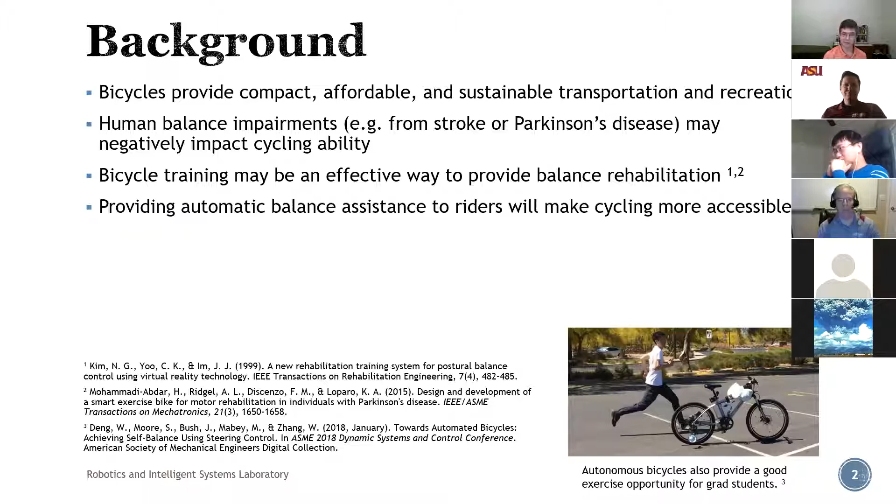Autonomous bicycles also provide a good exercise opportunity for grad students. This was a previous development in the Smart Bicycle project that started back in fall of 2017, and this shows our previous steering balance system in action.

Some research questions that I developed: how can we identify the rider's steering intent from the interaction forces? If we're going to provide balance assistance to the rider by controlling the steering, we still want the rider to be able to maneuver the bicycle freely in the direction they want to go, and in order to do that, we need to figure out what their intent is.

A constraint on that is we want to do it with non-invasive sensors. We don't want to have wearable sensors that you have to apply all over the person's body to figure out what they want to do.

We also want to study how healthy cyclists respond to induced bicycle steering disturbances. This means that if you're riding along and you go over a bump or something twists your steering, how do you react to that?

So I looked at developing a method for inducing repeatable steering disturbances on the human bicycle interaction bike. Then, as a second part to this thesis: how can controllable balance assistance be provided in a self-contained bicycle system?

This should be accomplished with stationary and moving balance control modes: one with a control moment gyroscope that generates internal non-anchored torque within the system to keep the bike upright, and also with steering control, which changes the steering direction of the bike while it's in motion.

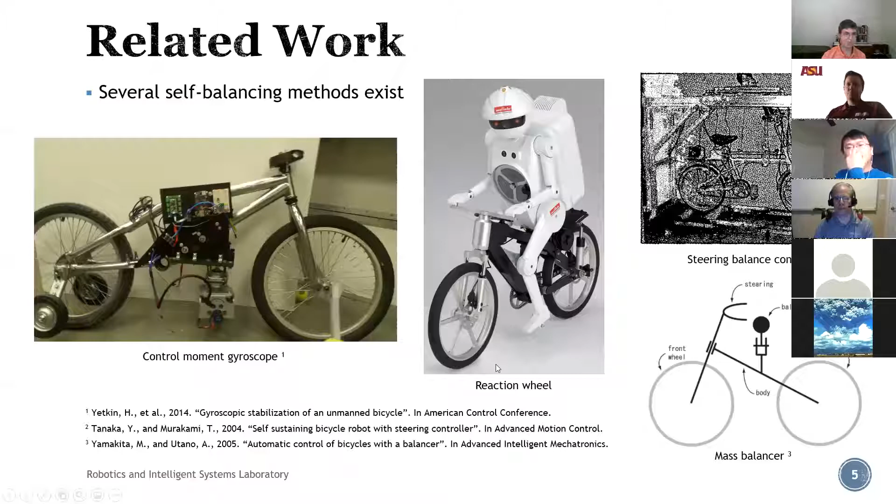So the scope is basically divided into two parts. I'm looking at how we can address these problems with an embedded systems approach.

For the comprehensive human-bicycle interaction system, I developed special instrumentation to capture the seat, handlebar, and pedal forces, and to capture the joint angles on the bike, as well as the inertial measurements, which include the bicycle rotation in space and the acceleration and velocity of the bike as well.

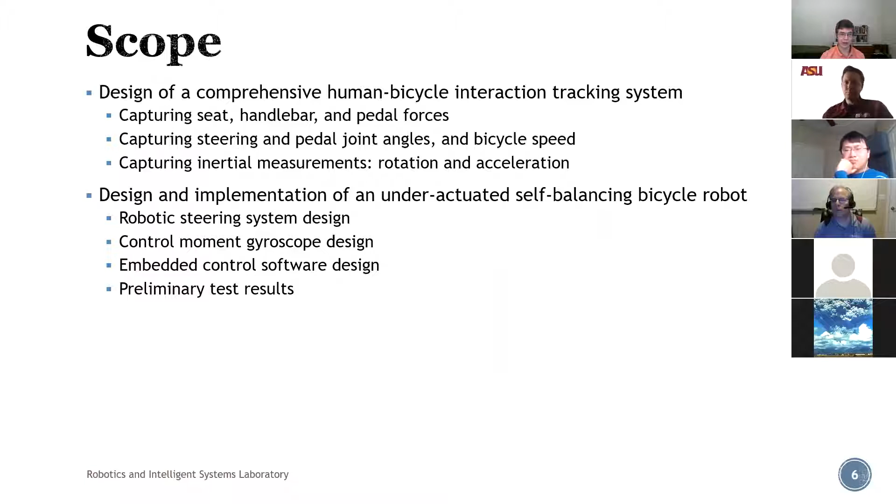And then I worked on embedded systems design for an implementation of an under-actuated self-balancing bicycle robot with robotic steering, a control moment gyroscope for stationary balancing, and embedded control software that will allow us to easily extend this system in the future and to conduct controlled experiments. And then I'll present some preliminary test results as well. So the outline's basically going through those things in order.

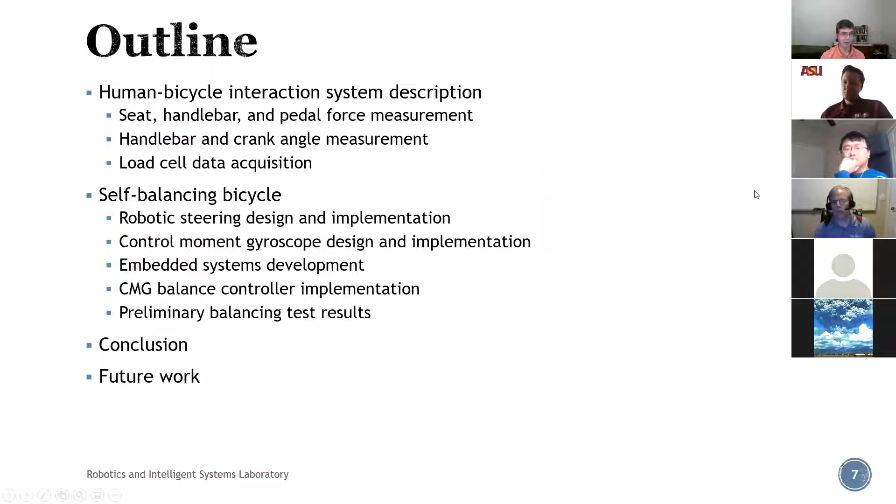Okay, I'll start with human-bicycle interaction.

So for the seat, this is work that was previously started during my honors thesis, and the seat contains 3 load cells positioned in a triangular configuration. The advantage of this, instead of just having one load cell on the seat post, which is the approach adopted by most people studying biomechanics and sports medicine, is that if we have 3, we can track the center of pressure on the seat.

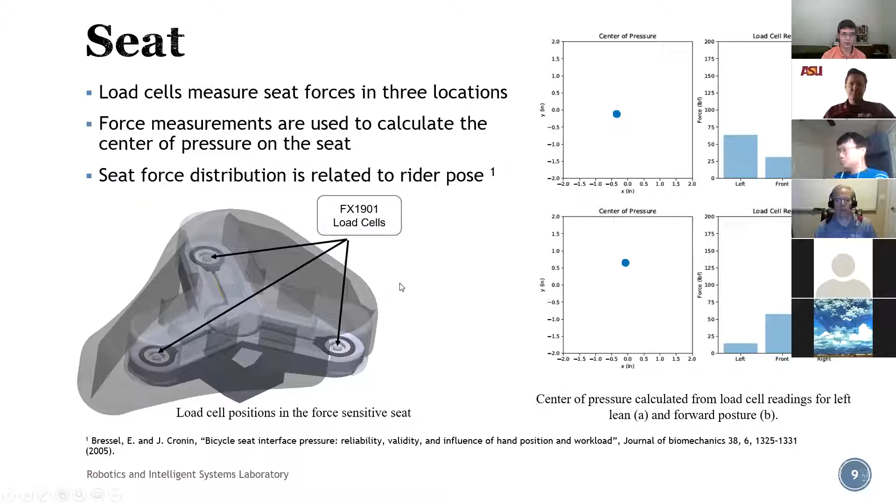So if you lean forward on the bike, that shifts the center of pressure towards the front. And similarly, if you lean to the right, that shifts the center of pressure to the right. So with these 3 sensors, we can get a lot more useful information out of the seat forces than just having a single seat force sensor.

Then for the handlebar, we're doing a similar thing. We're measuring the force applied in 3 dimensions with this multi-axis load cell. This figure shows the evolution of the design from the initial concept with 2 3-axis load cells mounted inside of a large shield to...

...a simplification of that design, after I determined that it was only necessary to have a single load cell. Then, due to the lack of availability of this sensor, I switched to using an F3G sensor from Forsentek, which is shown here, and that's encased in a protective shroud.

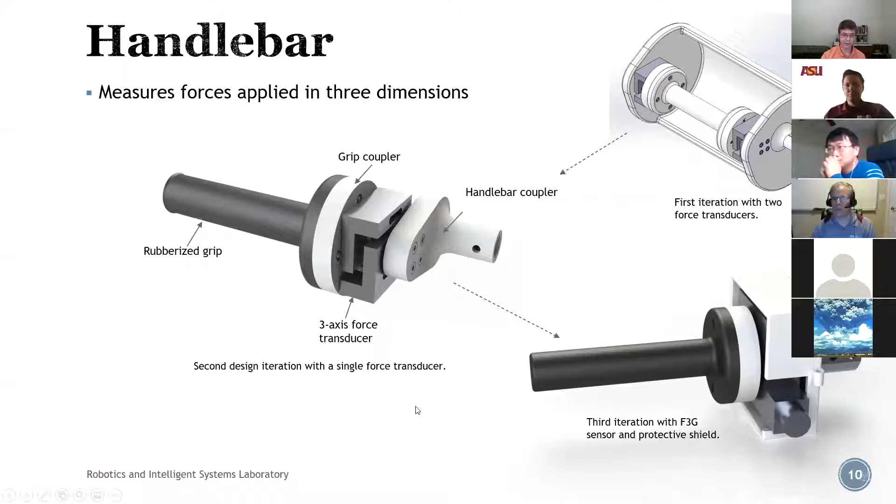So this shows the actual implementation of this system here. We have the bicycle handle grip and the brake, and these represent the primary handlebar contact points between the rider and the bicycle handlebar, and those are coupled to the bike handlebar through the 3-axis load cell.

This sensor has a plus or minus 1 kilonewton sensor range, which should be enough to detect any forces the rider would be capable of applying during normal bicycle operation. It also has a 1 millivolt per volt sensitivity, meaning that for every volt of excitation voltage you apply across the bridge in the load cell, you'll get 1 millivolt out at the full sensor range.

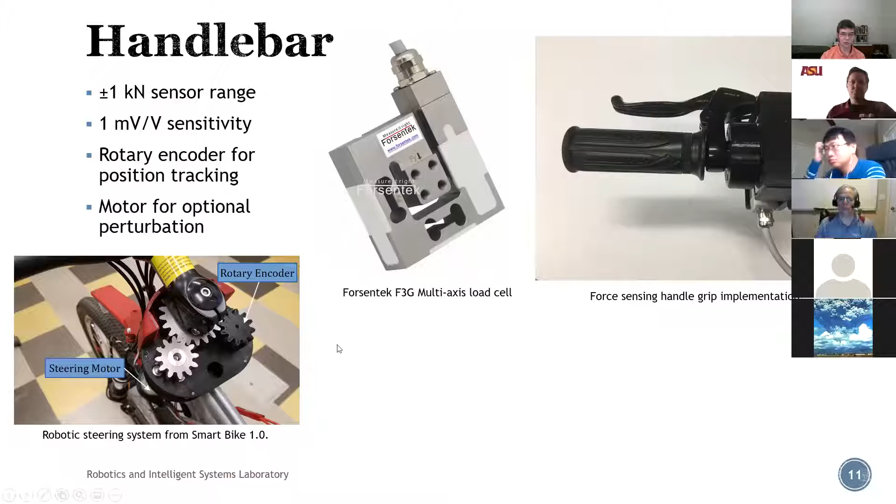Then for providing the controllable perturbation, we adopted the robotic steering mechanism from the previous self-balancing bicycle design, which contains a steering motor on the left, and we can control the current applied to this motor to produce a controlled steering torque. This can be repeated through successive experiments with different riders, giving useful information about how they respond to steering disturbances.

Okay, lastly, we need to look at the forces that are applied between the rider and the bicycle pedals. This is an interesting problem because there are several ways to do this.

One way is to have a torque sensor on the shaft that measures the torque transmitted from the pedal into the bicycle drivetrain, and then you can work back by figuring out what the pedal crank position is and the length of the crank to get the force. However, that approach also relies on having an additional encoder to measure the angle of the pedal in relation to the bicycle crank.

So the approach that I adopted was to install a pedal force sensor directly on top of the bicycle. This is the Forsentek FCB pedal load cell, which also has a 1 kilonewton range, and that's mounted on top of this split mount here, which clamps around the bicycle pedal and allows any forces applied to the pedal to be measured directly.

Then I also have a rotary encoder here, which meshes with this split gear, which you can install on the bike after it's been assembled. And that's simply so that we can know the position that the cranks are in, because that's important when you're accounting for pedal forces within the human bicycle interaction model.

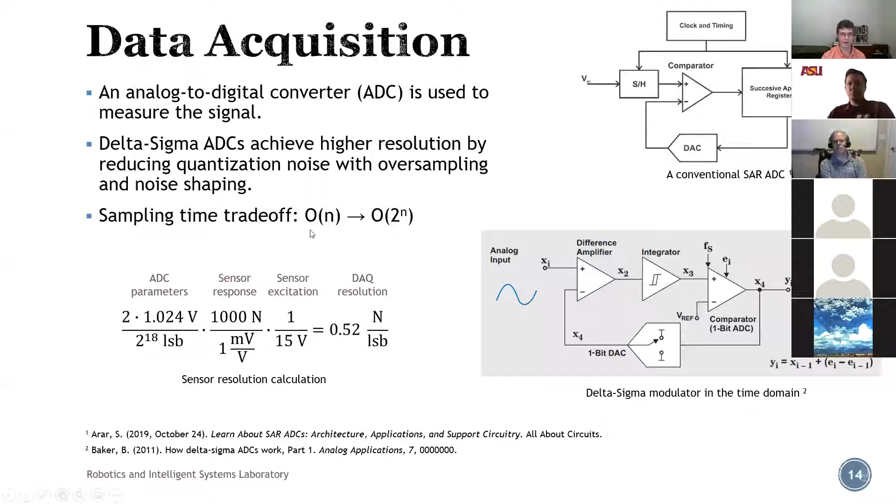But we have a little trade-off to make, because when you're looking at the width of the output value, the SAR ADC is on the order of n, so you have n steps to get n bits out. But for this, you have to take 2 to the n samples in order to get n bits out. However, the simplicity of the delta sigma modulator means that you can take these samples a lot faster than you can with the SAR ADC. So it is slower, but not as slow as it would seem.

Okay, so the previous section was cut a little short by the pandemic, because I wanted to conduct more tests with motion capture, and I only got some of the sensors last week. Because of that, I've spent a lot more time working on the self-balancing aspect of this project as well. I'll go into that now.

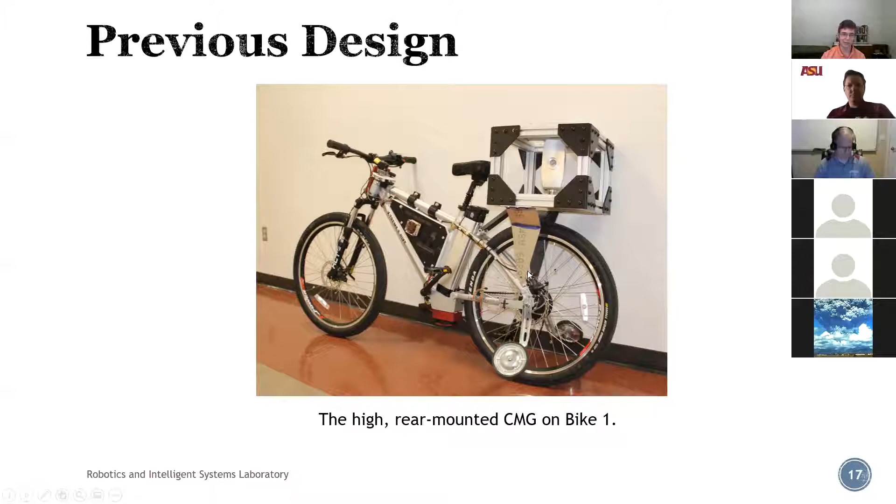So to address that, we selected a new bicycle frame where the CMG can be mounted very low in the frame. In fact, the position of the center of mass of this CMG box is almost aligned with the center of mass of the bicycle frame just by itself. So the addition of this CMG doesn't raise the center of mass as it did with the previous design, and this makes the system a lot easier to balance. If we add a seat here and some foot pegs on the side of the CMG, it also gives room for a rider.

So Jonathan, yeah, can you take a question now?

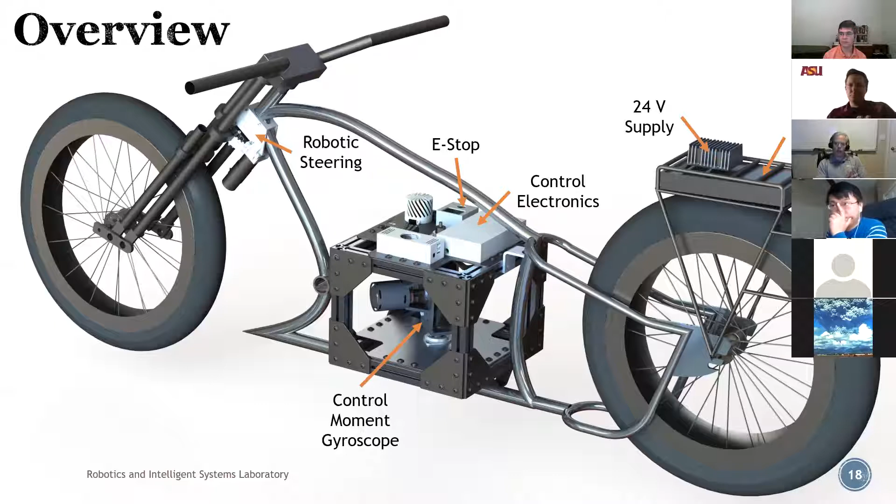Sure. Okay, so you said that having a higher moment of inertia made it harder to control. My understanding, though, from the inverted pendulum problem, is that having the mass up at the top, the higher moment of inertia means that your angular change is going to be less. Then it'll be less susceptible to perturbation than if you have a lower center of gravity.

Yes. What do you mean by the statement that it's harder to control? Okay, what I meant is that it would require a higher input torque to counteract the same amount of angular displacement. Okay, thanks.

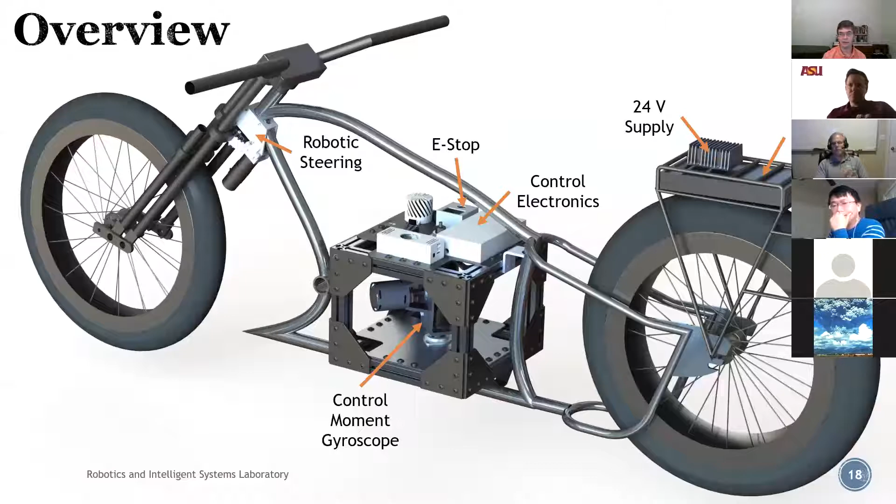Okay, so within the power subsystem, we have 3 different voltage rails. One is unregulated 48 volt DC from the battery, and that powers the CMG actuators, which are the gimbal motor and the flywheel motor. The battery is connected through a kill switch relay setup so that we can shut off all the power in case an unsafe condition arises. Then we have regulated 24 volts DC for the robotic steering and for the onboard computer that we plan to install in the future for higher level controls. And then there's 5 volts DC for the microelectronics on the bike.

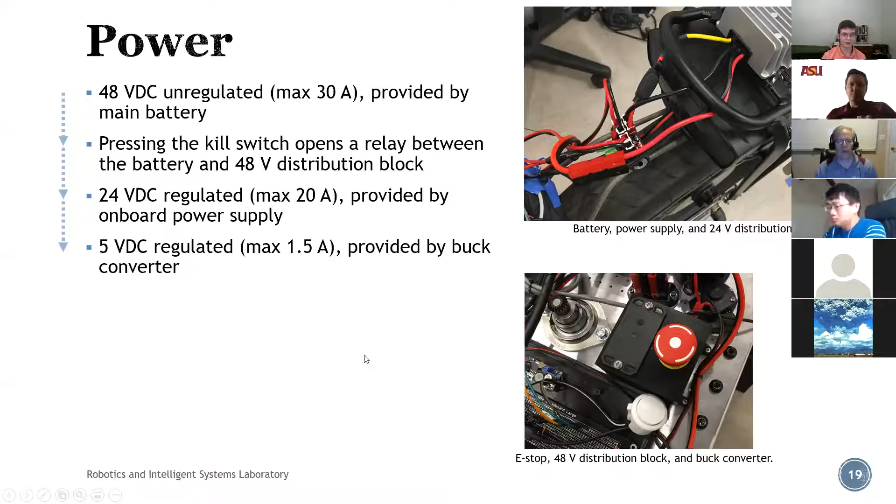Okay, so here's an overview of the evolution of the robotic steering system. This is the previous design that I already showed. For the new bike, I moved the motor to the side so that we could position it underneath. This is basically this design but flipped upside down. However, this motor would interfere with the fork design on the new bike, so the motor was moved into this position. This system is very compact and can be mounted on the bike without any frame modifications, and it also allows the steering to be controlled with minimal impedance if we just wanted to ride the bike around and log the data from the encoder.

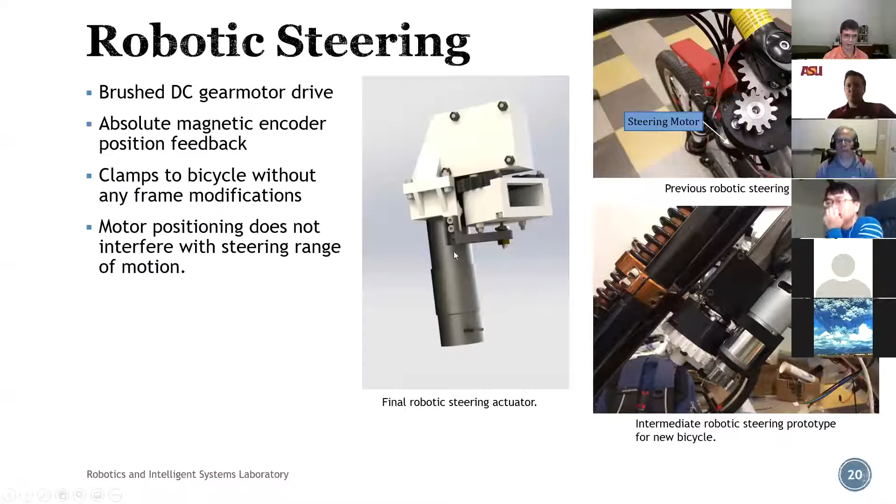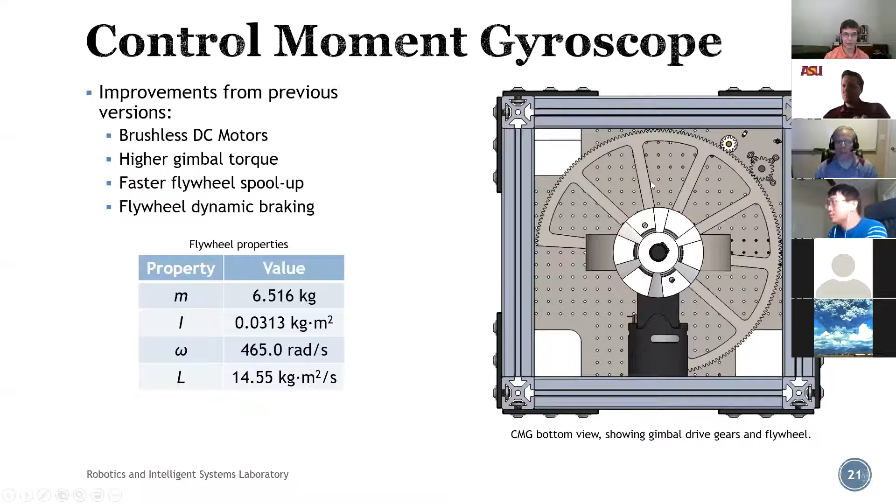Okay, then the control moment gyroscope. This is the core piece of the work done here. It contains a flywheel which spins at 465 radians per second, and then there's this large gear which transmits torque from the gimbal motor to the flywheel gimbal. That causes the gimbal to twist around, which changes the orientation of the angular momentum, creating a torque within the system. This is an improvement from previous designs.

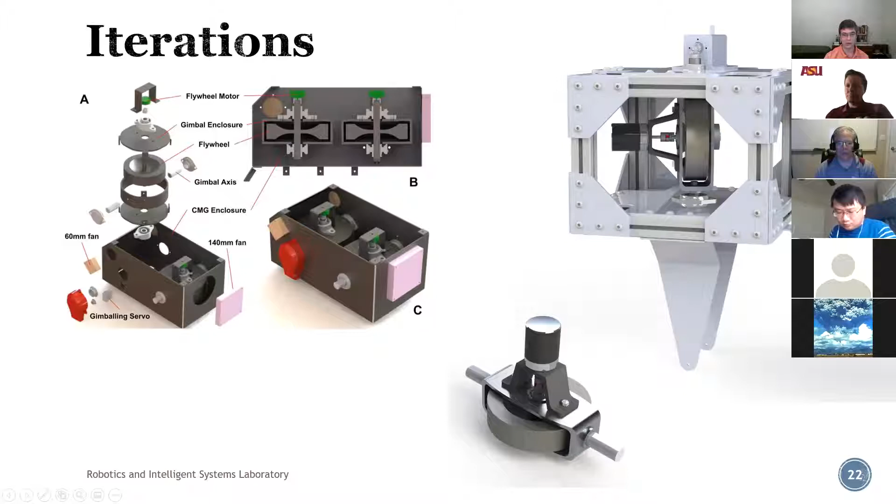Okay, then we'll move on to the sensors used within the system. The most important sensor is the inertial measurement unit, which gives us information about the bicycle angle, the roll of the bike, and also the angular velocity. These are inputs to the balance controller.

Initially we were using the BNO055 absolute orientation IMU. This is a sensor that's commonly used in phones and gaming controllers and things like that. However, this sensor has a simple complementary filter implementation and is fairly low accuracy, with a maximum error of up to 5 degrees, which is not suitable for this application.

So we switched over to the Pixhawk flight controller, which has an improved IMU with a maximum error of about 0.5 degrees, and it uses an extended Kalman filter, which has much higher performance than the BNO055.

Then we also have an encoder which gives position feedback to the motor controller and to the balance controller.

Okay, and then actuators in the CMG. We use high torque brushless DC motors with this O-drive robotics high power motor controller. The advantage of this unit over the previous approach of using brushed motors and standalone motor drivers for each motor is...

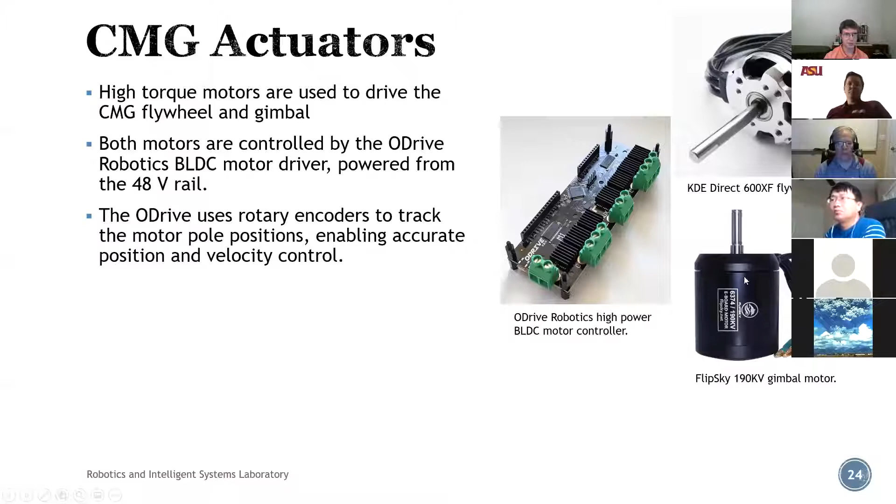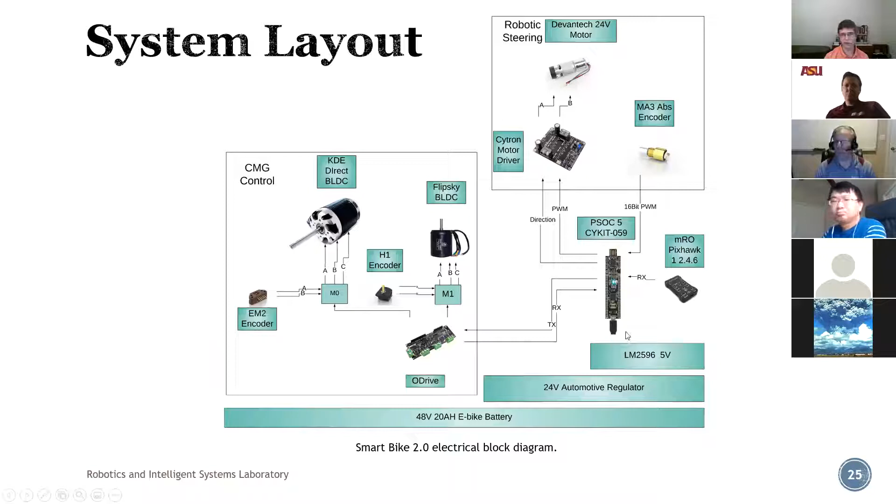This is just a regular ASCII command system where we can send data back and forth over text. It's parsed here, and then the IMU uses a special Mavlink communication system, which was also ported to work with the PSOC development kit.

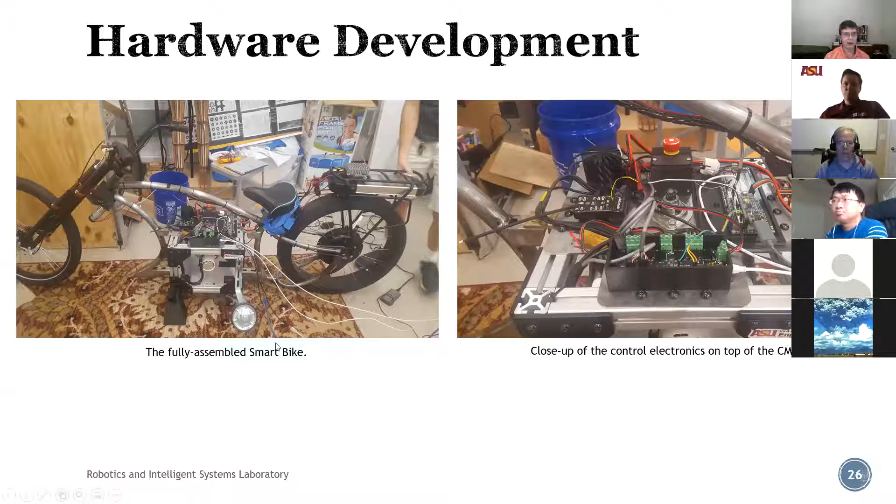All right, so now we'll get a little bit more into the embedded software. We chose to use a Cypress PSOC because that is a microcontroller that's already used within the robotics program here, and it also has a high degree of customizability and interoperability.

So we can use these configurable digital blocks to define the interface between the CPU and external hardware components in pretty much any way that we want. This is in contrast to a standard microcontroller, which offers a set of predefined interfaces that we can use. So if we want, for instance, to have a lot of PWM outputs, we can define as many of those as we want, pretty much.

In this case, we have interfaces with the magnetic encoder, the steering motor controller, the O-drive, and external buttons through a hardware debouncer. And then we can also communicate with other computing devices over a USB CDC interface or through a regular UART.

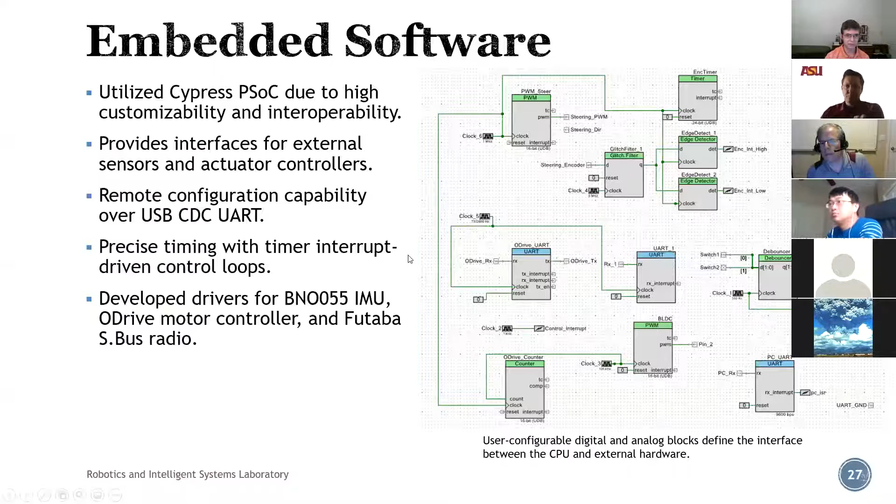Okay, the software is divided into a few primary components, which are separated into different files. The main file contains all of the high-level balance control logic, including the CMG controller and the steering controller, as well as initialization routines.

I've also provided an API for communication with the O-drive, and this contains implementations of all of the different control modes for the O-drive. This allows us to control the velocity of the motors directly, as well as ramping with predetermined current and position control.

Then for the steering, we can either run it in regular closed loop mode, where we set a steering target and it holds the steering at that angle, or we can run it in open loop mode, which allows us to set the steering power. The open loop mode is useful for the stationary steering balance control algorithm, where we use torque generated by twisting the handlebars to balance the bike while it's stationary.

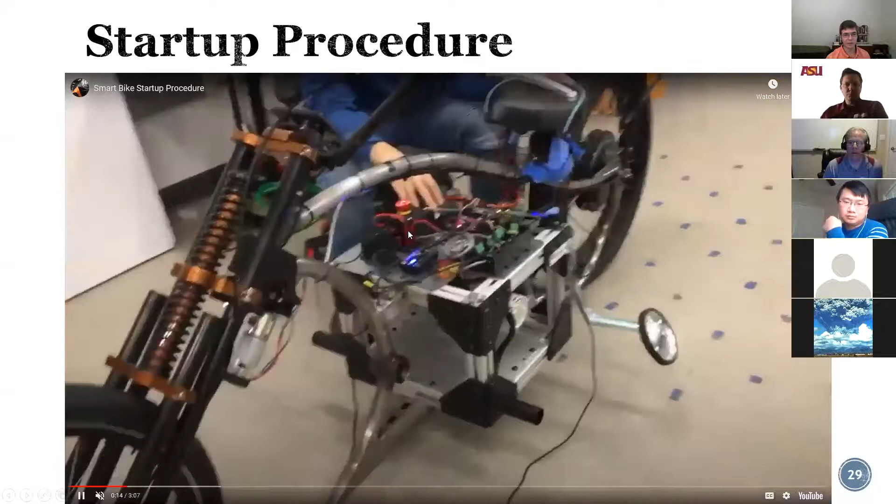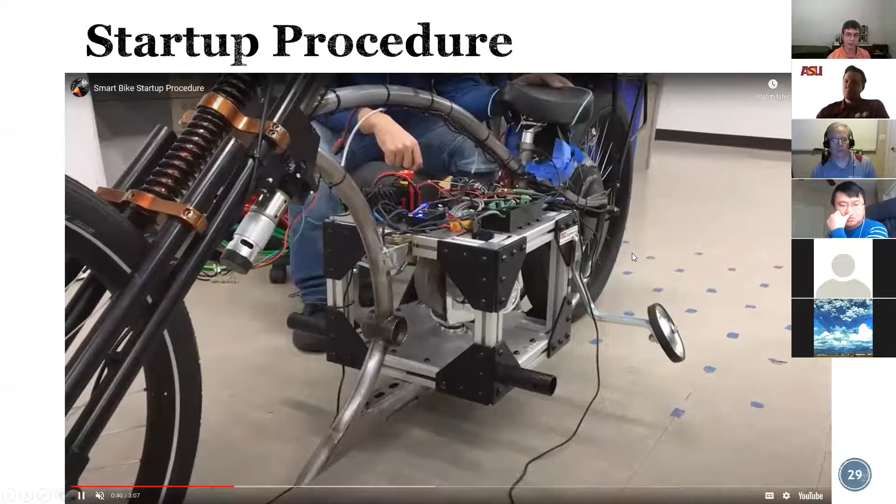We start by pressing this trigger button here on the bike, and that will perform an O-drive calibration routine where it rotates the brushless DC motors to determine the alignment of the motor poles with the encoder disk. This enables what's called sensored brushless DC motor control, where since it knows where the pole positions are, it can apply voltage across those poles to give very precise position and velocity control of the motor.

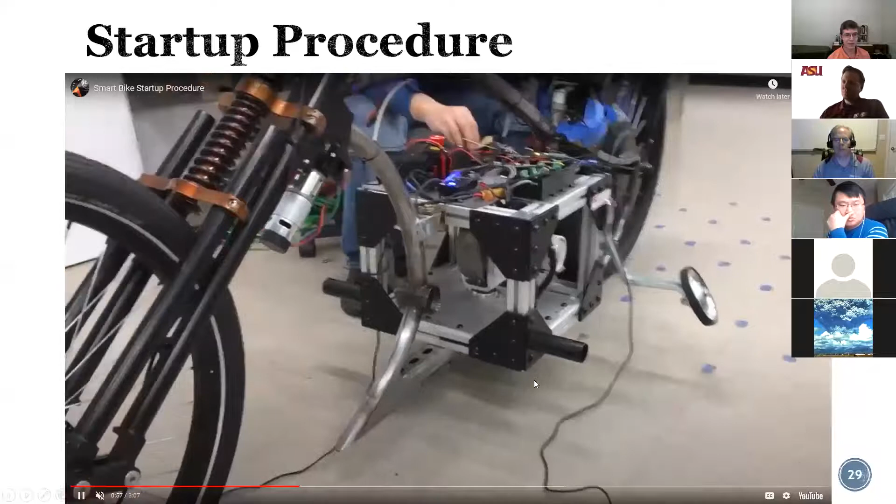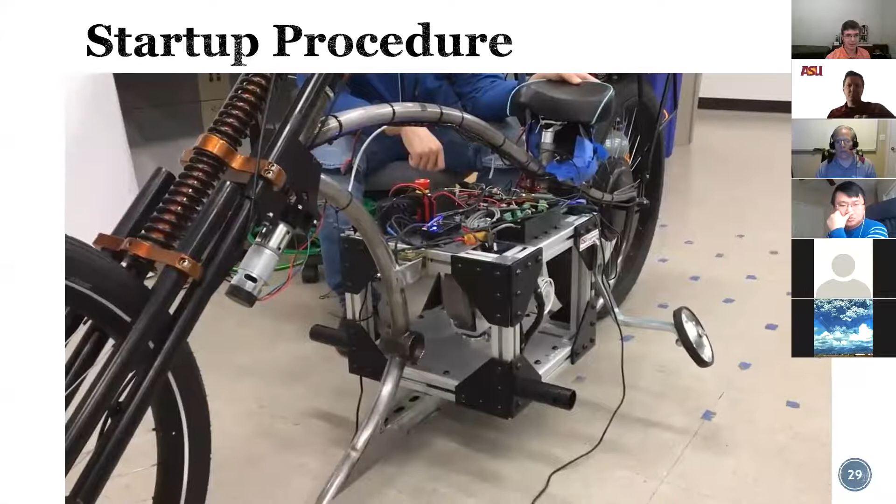Okay, so then it'll tell us to press the button to start the flywheel. This will start the flywheel spin-up operation, where the flywheel is gradually spun up to its target RPM. That takes a few seconds. After the flywheel has reached the target RPM...

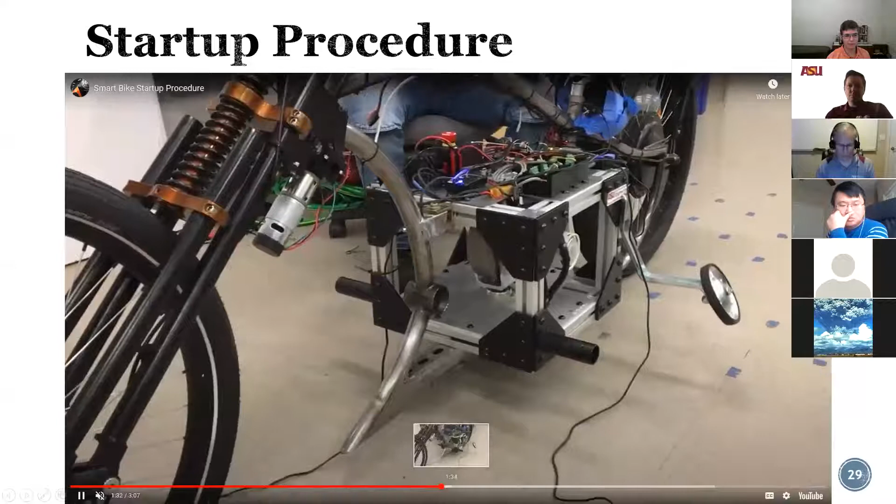Then we can start the balance controller. I have this interface here which lets us adjust the control gains in the PID controller in real time during testing, which is a major advantage because previously if we wanted to change the control gains, we'd have to edit the source code, recompile it, re-flash the microcontroller, and go through the whole startup routine again, which could take up to 5 minutes or more per trial. But now, in a few seconds, we can adjust the gains.

Okay, so then we'll start the balance controller here, and you'll see the gains are very low right now, but now the bike is trying to balance itself.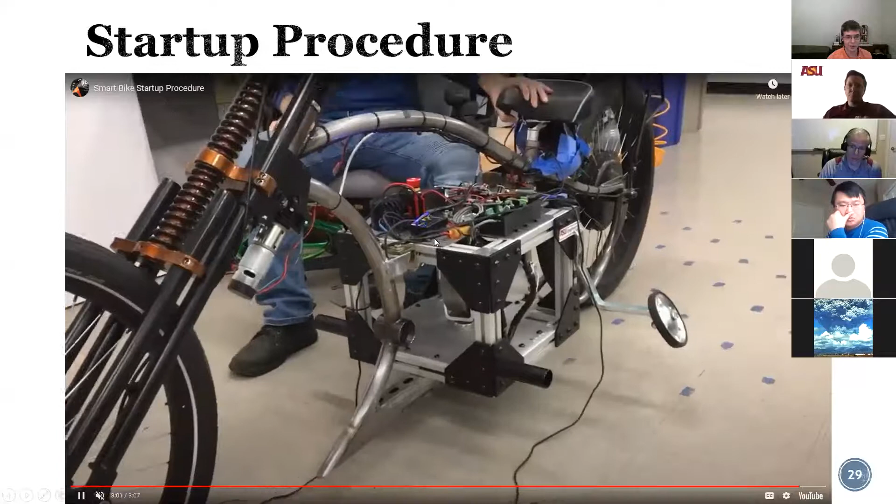This is just a demonstration and it's not well tuned yet, but if we want to stop the flywheel quickly, then we can press the white button again, and that'll spin down the flywheel with dynamic braking, where all of the energy in the flywheel is fed into this power resistor here, and then we can shut it off with the emergency stop. So that's an overview of how we run our tests in a safe way.

Okay, now moving on to a little bit of the controls.

So the system utilizes a cascaded PID controller. I'm not going to go into a whole bunch of depth on this because this was not the primary focus of my thesis, but I think it's still useful to understand what's going on here.

So we have an outer PID loop which is used to stabilize the roll angle of the bike, which is phi B here. So if the bike is leaning to the side, that will drive the rotation of the gimbal to create a torque, pushing the bike back to the centered position.

But the problem with only having this outer loop is that now the gimbal is twisted over to the side, so we've got a high phi omega here. And when that approaches plus or minus pi over 2, or 90 degrees from the centered position, the useful output torque is close to 0. So that means that once we perform that recentering operation, the actuator is saturated.

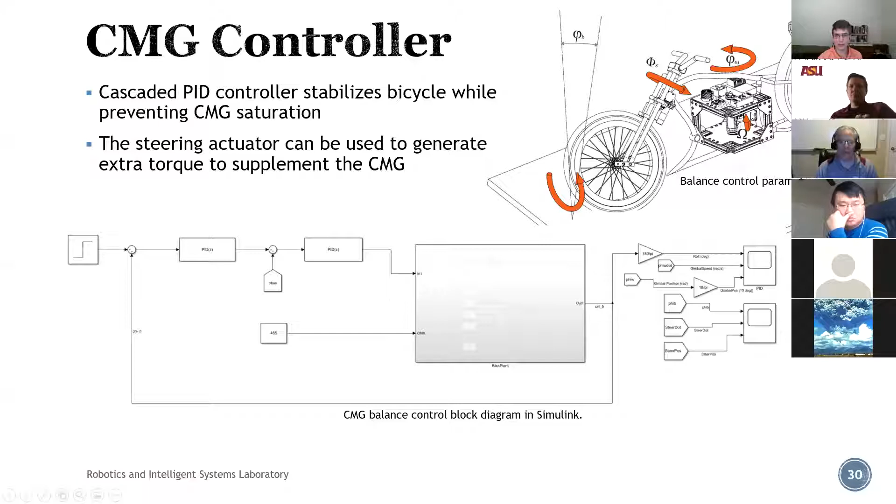So to counter that, we have an inner PID loop cascaded within this system, which also drives the gimbal position to return back to center. This prevents the actuator from becoming saturated over time.

Okay, so we let go of the bike here, and then it's staying upright. Okay, and then it falls.

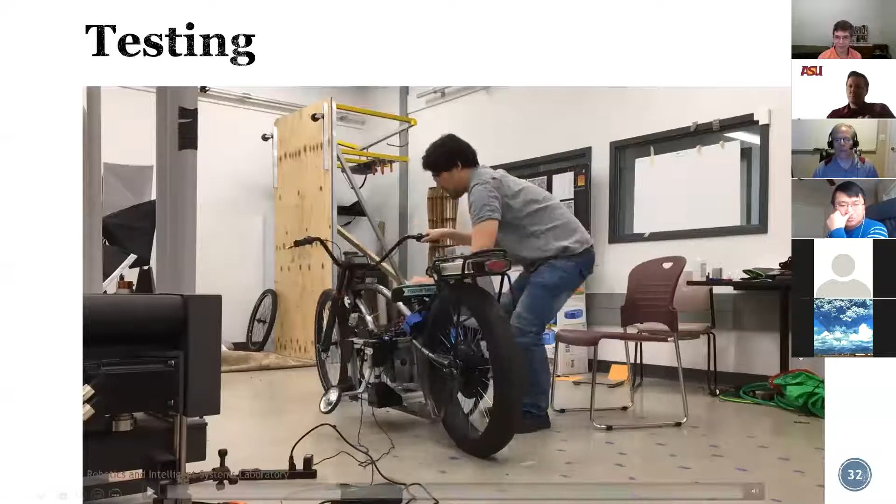Okay, so now we've reached the end. In the future, since there were setbacks with the shipment of the sensors, I didn't get to run all of the tests that I wanted to with the sensor system.

So the first thing would be to finish that up, and when the motion capture drone studio at the Tempe campus opens back up, go in there and collect data with that system that could be useful for validating human bicycle interaction models and gaining better insights into how humans control bikes. Hopefully some of that knowledge can be applied back to control systems.

Then some more things to do would be to create trajectory and path planning algorithms to help the bike navigate autonomously or semi-autonomously. For instance, if you're biking down the road and there's an obstacle that you don't see but the bike sees it, it could perform some action to prevent you from crashing.

And then lastly would be to integrate the human bicycle interaction system and the self-balancing system so that this single integrated system could be used for rehabilitation or autonomous transportation. So the impact of my work is I designed and implemented a comprehensive human bicycle interaction monitoring system, which is useful for human bike interaction research.

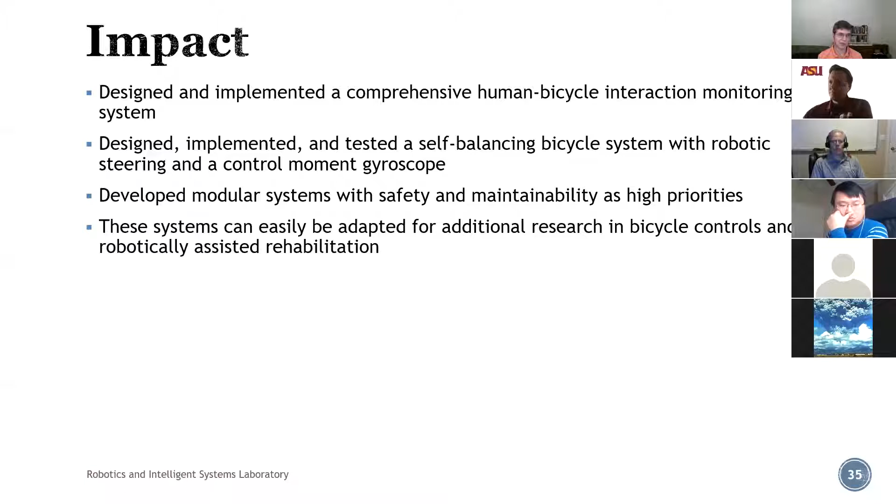Okay, thank you. And with that, I'll take some questions.

I've got a question for you. I know this was not directly related to your work, but has anyone done any characterization of the response of the bicycle? I'm thinking of classical control systems, impulse response, because that actually does set some constraints on the software that you write, the response times, and the frequency response of your software for controlling the bike.

Yes, I believe that has been done. I did not look too much into that area, but I know some work has been done with using CMGs to apply a step disturbance to the bike, and then using that to characterize the system response. That's also been done with human-bike interaction. There was a group at Rutgers University which put a CMG on the back of the bike, then had a participant riding that bike, and they could induce a torque with that and look at the response.

It seems to me also related to this system that you've come up with, understanding—and I don't mean stability in the informal sense, but stability in the control system sense—how or what are the domains where your control system is stable? Because you showed us an example of the bicycle falling over after 8 seconds.

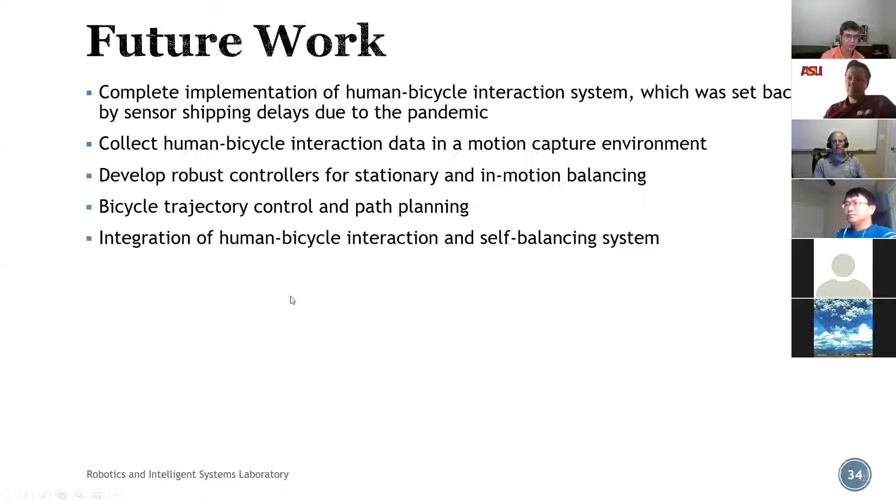It appears like your PID is too high, the proportional portion of the PID, and maybe the differential is too high.

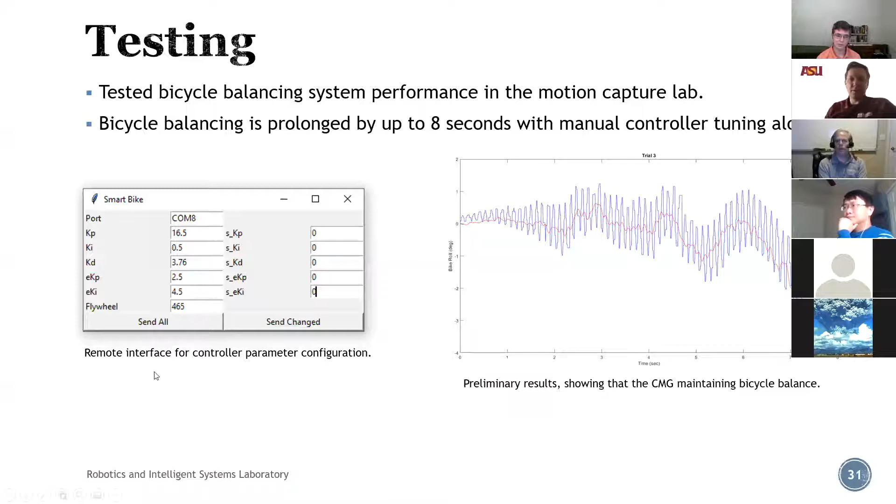I have another question. Initially in your presentation, you presented some related work and showed shortcomings of other approaches, which led to how you tackled the problem or the specific aspects of the project you focused on, for example, not having any sensors attached to the driver, instead everything attached to the bike itself. Were there any parts of the related work that you used, or specific things already researched with solutions found, that you could reuse and apply during your work on the thesis?

Yes, there were several things, such as the measurement setup. They measured the forces in slightly different ways, but they had a force sensor in the center of the handlebar, a torque sensor for the pedals, and a force sensor on the seat post. Our sensor configuration is similar, however, I have added additional sensors so we can capture more force information.

The idea behind that is we can hopefully use that additional force information to compensate for the lack of an IMU on the rider's trunk. All right, thank you.

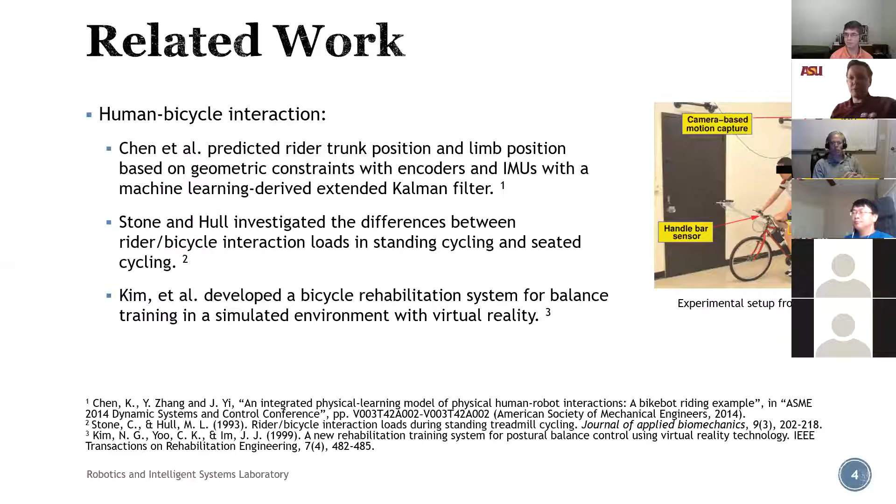Going back to your presentation, you mentioned you had a total of 3 research questions. The first one was about steering intent and how to determine it, and the second was how riders would respond to steering disturbance while riding. In the presentation, I think that was related to not getting the sensors in time due to the pandemic. I'm curious about the future work aspect. Do you plan to finish or be able to answer these research questions before the deadline of your thesis, or is that more unlikely?

I think it's more unlikely that I'll be able to give a very good answer to these questions before the deadline, but I would hope to collect some experimental data that will help answer these questions in the future. Okay, so at least to give an outlook or outline for the first research question, getting some data once you get the sensor, hopefully in time, at least measure some preliminary data that you could present in your thesis? Yes. Okay, all right, thank you.

I think that's going to be the plan, right John? We'll probably try to collect some data. We have to figure out how we can get access and maybe where we can test this stuff. I think in the worst case, we'll probably just have to run the bicycle outside. Yeah, because the deadline is in 10 days, so this might be tough to finish the thesis and still do the measurements. I was just curious about the current state and what the plans are. So thank you.

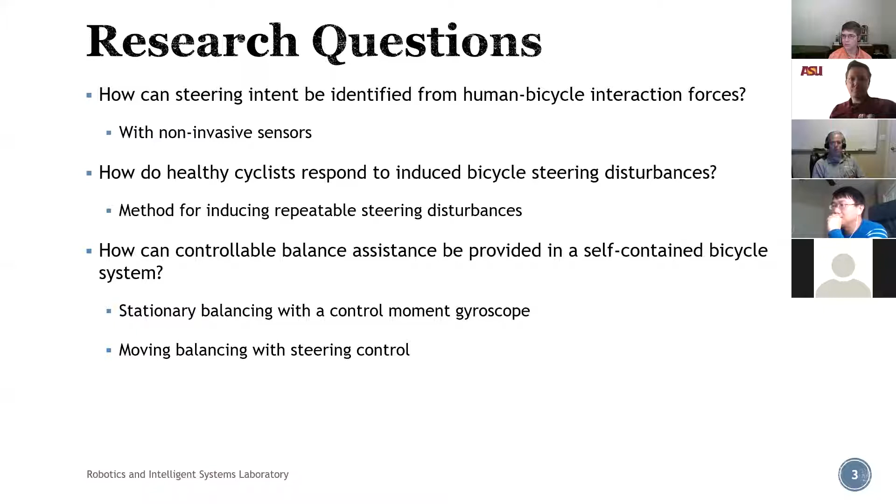I'm going to give you, well, I learned that from my student. Maybe you can create a breakout room with us three. That might be possible, yeah, I think I can do that. And then we have a separate room. I can create a room. No, I might have co-host. You should be the co-host. Let me see, I'll assign you guys to a breakout room.

Yep, thank you. And thank you again for the presentation. Yeah, good job, good job. Thank you. What?